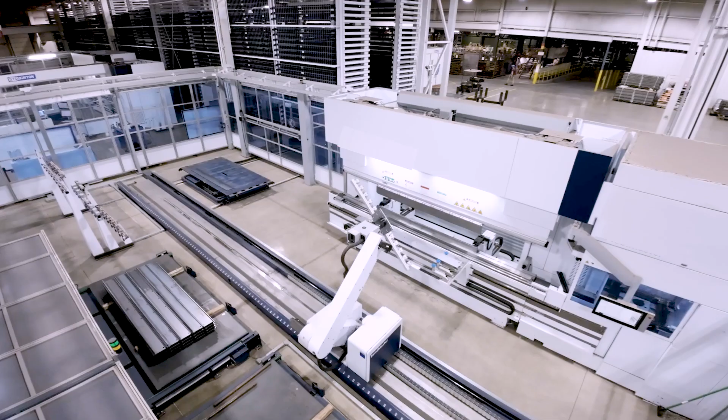From our modest beginnings back in 1961, Stoughton Trailers has evolved and grown to become a true leader in the trailer industry. The Wahlin family has successfully led this Wisconsin-based company through the many highs and lows of the trucking industry, while always investing in operations and technology to prepare for future growth.

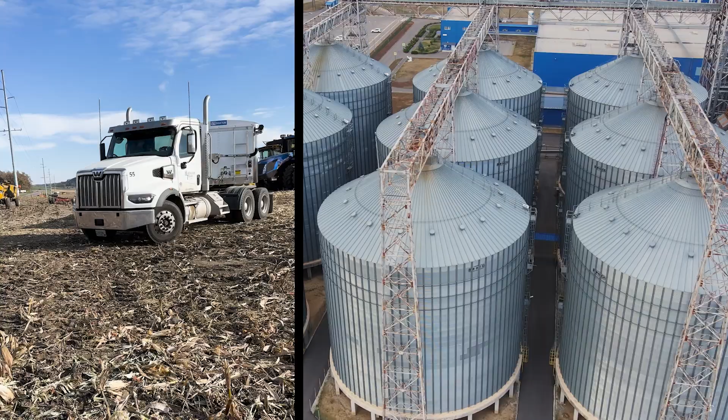Our extensive trailer product line can be counted on to transport freight all over North America, while serving many diverse markets. Our popular dry van trailers are the true workhorses of the transportation network. Stoughton intermodal chassis move containers between shipyards, rail yards, warehouses, and customer locations, while our rugged grain trailers handle the load of moving agricultural products between farm fields and storage facilities.

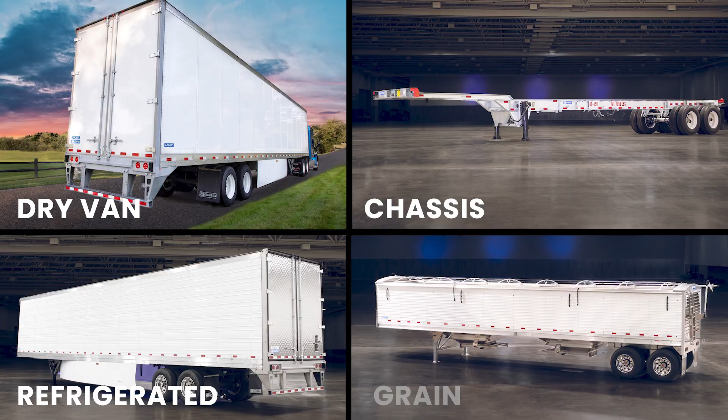Our refrigerated trailers efficiently transport food and other temperature-sensitive freight. Stoughton Trailers is the only trailer OEM offering the combination of these four product lines. We are truly trailer experts.

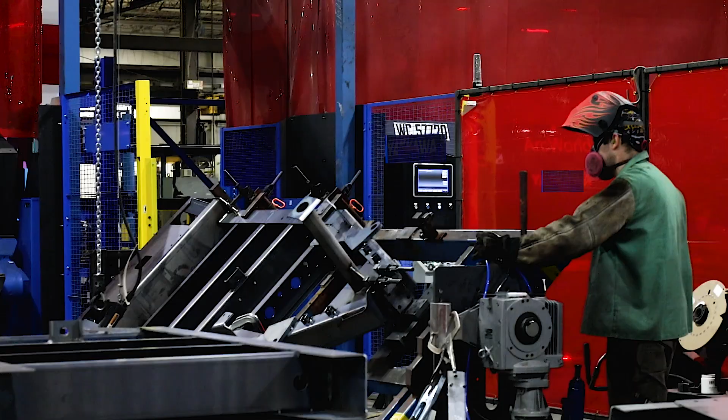Stoughton products have earned the reputation of being the best-built trailers in the industry. The company leverages technology, automation, innovation, and comprehensive control processes that all add up to a trailer being built better than the competition. Having a better-built trailer provides customers with a more durable product that retains its value longer, increasing the return on investment.

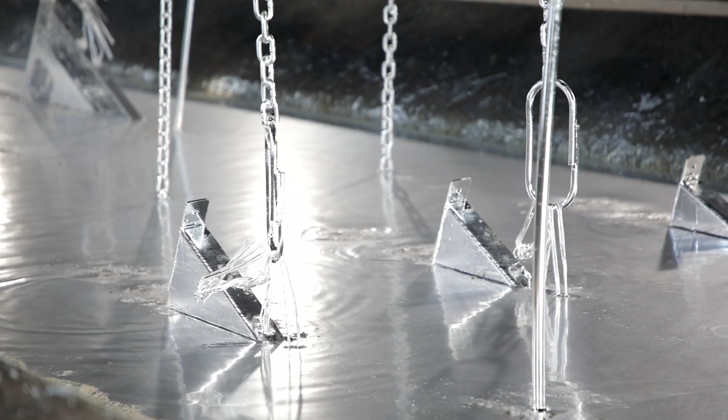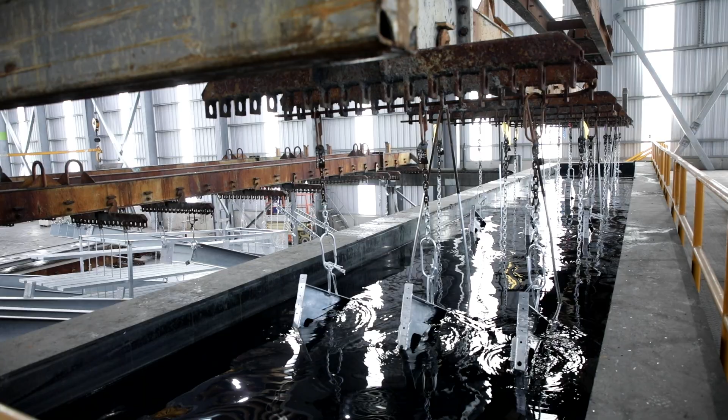Stoughton has taken a significant step to improve the durability of our trailers by galvanizing many of the steel components across all four of our product lines. To optimize the product life of trailers, the steel components need to be protected from corrosion. The company is leading the transition to galvanized components that provide customers with a product that lasts longer, requires less maintenance, and reduces the carbon footprint of the company thanks to the environmental benefits of the galvanization process.

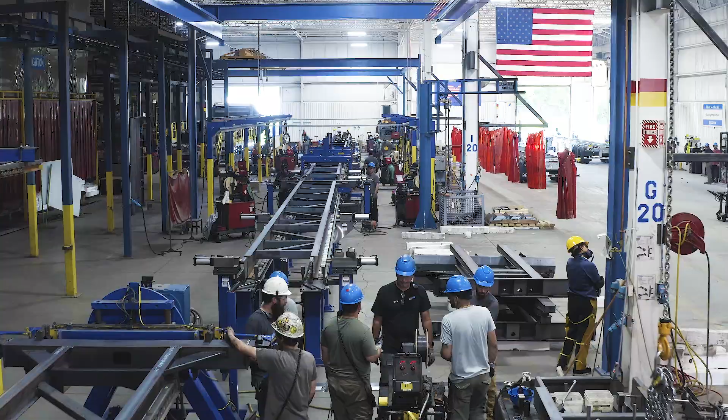We are proud to say we have over 1.6 million square feet under roof, which includes 6 manufacturing facilities across multiple states, including 3 lines dedicated to dry vans, 3 lines dedicated to intermodal chassis, and dedicated lines for grain trailers and refrigerated trailers as well.

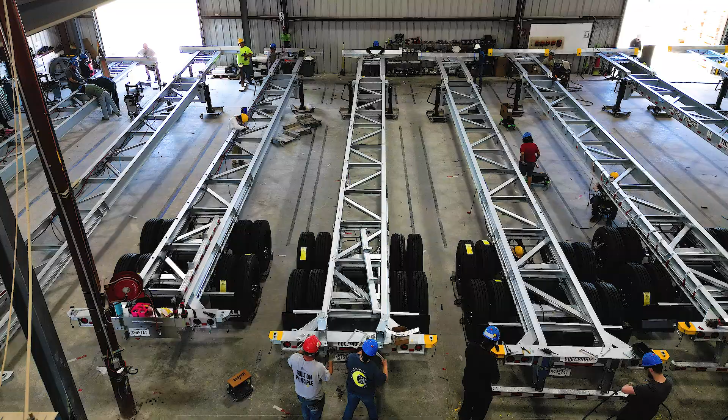Stoughton Trailers manufacturing operations include the legacy operations in Stoughton, Evansville, and Brodhead, Wisconsin. In 2022, the company built an 80,000 square foot plant in Waco, Texas, to support our chassis sales growth. This new facility provides the company with better access to customers, as well as rail and shipyards in the southern U.S.

Stoughton Trailers utilizes state-of-the-art manufacturing equipment and processes. In the last 5 years, we've invested over $40 million to create a fully automated component fabrication center.

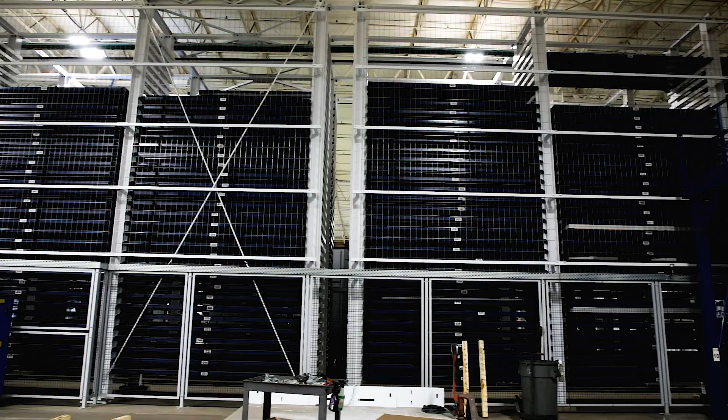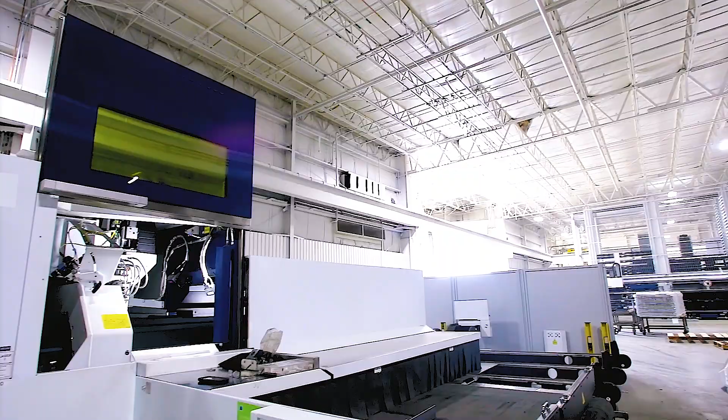The heart of our component fabrication center is our automated material handling system that stores and delivers 4x8 sheets of steel to the specified laser cutter. Our arsenal of laser cutting equipment allows us to create intricate designs with speed and incredible precision.

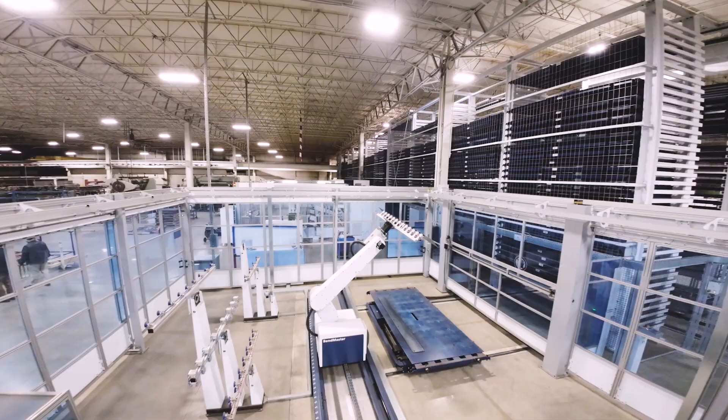Our robotic bend cells ensure that every bend angle of every component is absolutely perfect, which improves the welding process and component integrity. Our advanced robotic welding cells ensure each weld is executed to perfection.

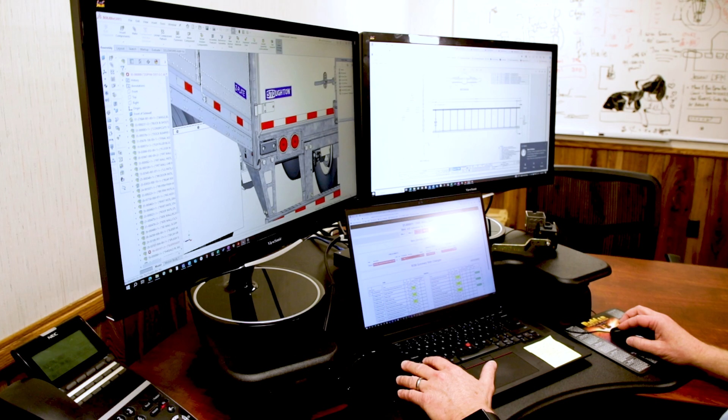Our commitment to innovation and technology ensures that we remain at the forefront of the transportation industry. Our objective is to provide trailer products that exceed customer expectations and set new standards for excellence. Our engineers utilize many cutting-edge software programs such as 3D modeling, stress analysis, and performance simulations to optimize trailer designs.

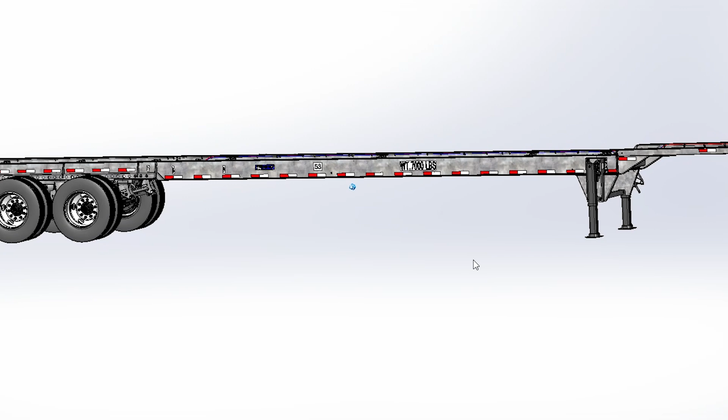Our commitment to innovation is reflected in our patents and ongoing pursuit of cutting-edge solutions. Our products have earned industry recognition and certifications for excellence in design, safety, and environmental sustainability, reflecting our commitment to quality and innovation. By utilizing the latest technology during the design and manufacturing processes, we can provide the best-built trailers in the industry.

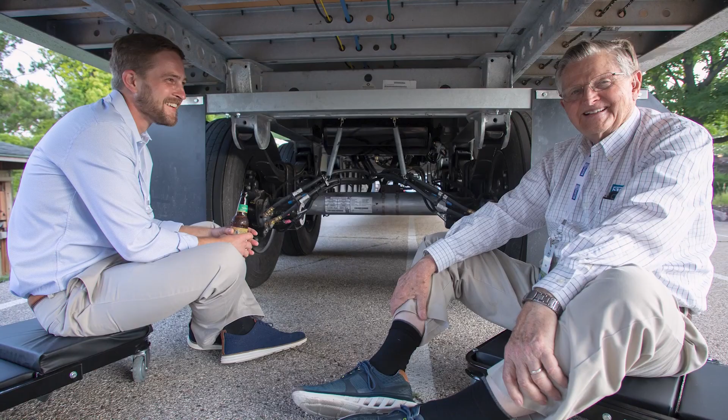Stoughton Trailers is dynamic. Through sales growth, the aggressive reinvestment of capital back into the business, and the adoption of technology, Stoughton Trailers has become a modern force in the trailer industry.